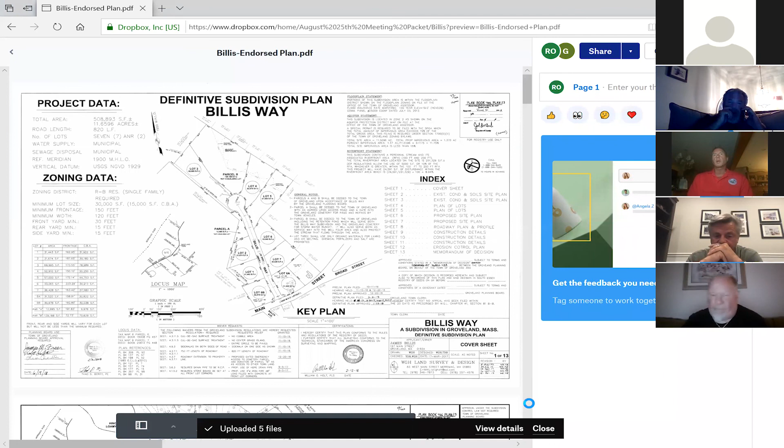I'm sorry, I'll say that again - 150 feet long for what? It calls for a 6-foot privacy fence. It's 150 feet long. Okay, that sounds fine. And that's going in before the snow flies.

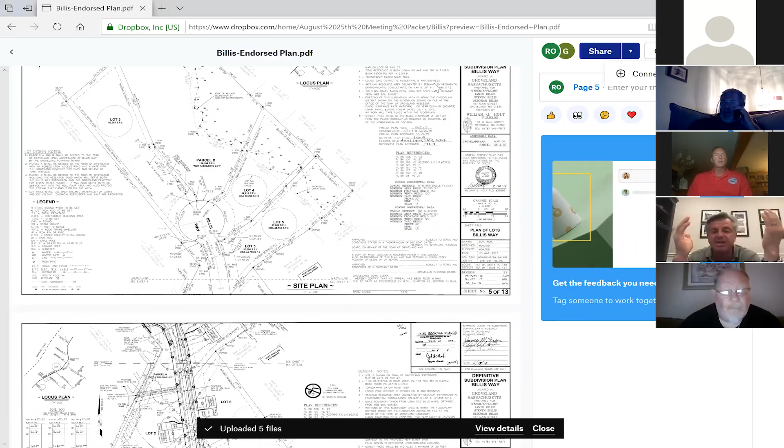So the orange fence will keep them out, and then there's the 150-foot fence. Nobody's going in there, there's nobody keeping anybody out. It's just these two lots. I'm just trying to move forward so we can protect these two and everything else.

And the permanent markings, once you're done with the landscaping and everything, those will go in. You can go take a look at them, we have them installed in other places. They're real easy to put in. And we marked that already. That's fine with that.

All right, anything else on this particular item at the moment as it stands?

Well, if I could, I would just like to ask if some of your planning board members would please just go walk that border, because there's nothing like seeing it. I'm happy to meet with you and any planning board member, we can set up an appointment, we can all go out together and review the whole site. It's fine, I'm open to that.

I've run into other people who were similarly visiting loved ones, and they were really dismayed. I know the plan is set, but you've also said you could change things. So like I said in the beginning, you have one chance on this to get it done right. I have no problem with people moving into our town, I was one of those people years ago. What I have a problem with is anything that destroys or completely dismantles what is essentially the only historic cemetery in our town.

Noted. I'm just trying to think if there's anything else at the moment besides that.

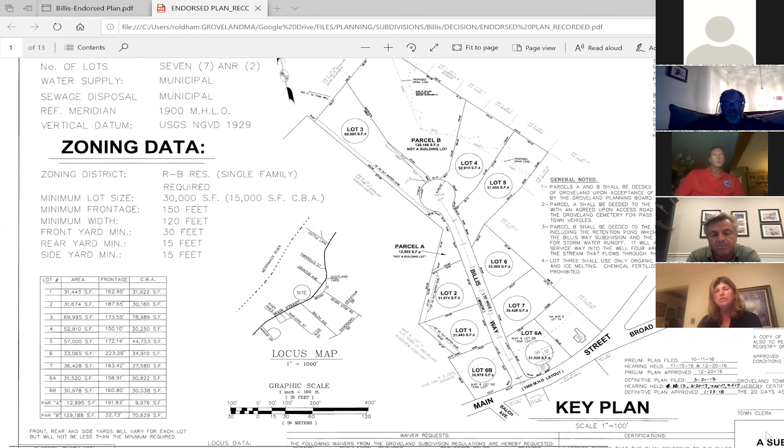But where are you cutting into the hill? Where does that begin on that plan? Because I'm concerned about the erosion. It looks like they just hacked into that hill to get that road in there. Well, I'm concerned about the erosion too.

Yeah, much like Atwood Estates, this plan has some flaws. I met with Peter and with Maureen Cameron, my engineer, and we discussed that. We're going to be submitting a revised plan which would grade and stabilize that slope in a better manner than what's designed on that plan. Hopefully this will be before the board on the 15th, and hopefully they'll approve it. And I will grade that hill and stabilize it. I'd like to do it right now if I could, but I need a revision to the plan.

You don't think it needs a retaining wall of some form? The retaining wall is a problem. The retaining wall designed on that plan can't be built, it's almost as high as the ridge. It's ineffective. I had this conversation with 2 engineers last week, and we all agreed we're going to submit a plan to the board and ask for a minor revision so we can grade that properly and stabilize it properly.

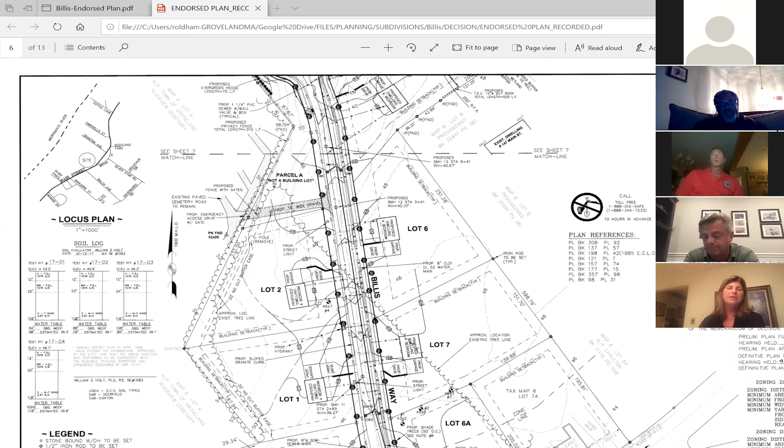Could I ask the planning board to get a town engineer to look into the cemetery side of it, what's better for the cemetery, his plan, or what should be done? Well, the plan's got to be reviewed by our engineer. So that would be Peter. Peter was there at the meeting. We discussed the best way to handle this.

Has he met with the cemetery commissioners to ask their opinion? I don't believe he met with them yet, but he was present at the pre-construction meeting. Absolutely, I met with the cemetery commission at the pre-construction meeting. I went over the fence, the planting, and everyone at that meeting seemed satisfied after they reviewed the plan.

Al, do you think you'll have that plan ready for submission on the 15th, or will it be a little longer? I'm trying to have it for the 15th. I want to have it stabilized. I think it could be a minor revision. I think Peter and Maureen Cameron will agree, and hopefully the board will agree, and we'll get it approved and get it done. I'd like to get that done.

My thing is I would like to get the plan prior to the meeting, not just on the 15th, so the TEC can actually review the plan and provide comments. Yeah, it's just going to be a sketch, Rebecca. It's not going to be a big thing. It's going to be what you call it, Peter? Something sketch. I believe Maureen Cameron called it a construction sketch. Yeah, construction sketch. Thank you.

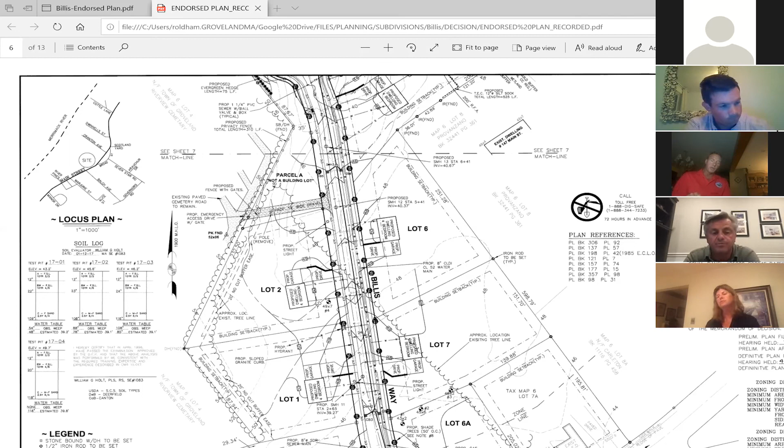Okay, so we've got a couple of things, and thanks for bringing that up, Al, and Kathy too, because that's something you picked up on, and that was one of the flaws in the plans. Happens sometimes. So what I would recommend, if you wanted to float a motion, is to get that orange fence up where the no-cut zones are for those lots we just talked about, and then hold off on the bond reduction till the 15th, so we can figure out if there's any change in the plan.

I mean, I'm all for minor changes, but it still has to be reviewed, and it's going to put a change on the plan. And then if it's all set on the 15th, we could just slide that onto the agenda for then. That bond reduction is for paving.

I was just gonna ask you, Al. Nothing to do with anything else, it's for paving? Just for the paving. Yes, because we held it back since you didn't have it done. I missed it by one day. I was hoping I was going to get it the last week. Exactly, I remember that meeting and everything. Yeah, I'm in favor of the bond reduction for the paving, definitely.

Is the paving already done? It doesn't look like it's all the way done. It's binder. The binder is done to the circle at the end. Have you looked at it? I've driven down there, yes. Okay, and you saw the cut in the hill and the condition of everything and you're still okay with all that? He just approved that he was going to take care of the hill and everything.

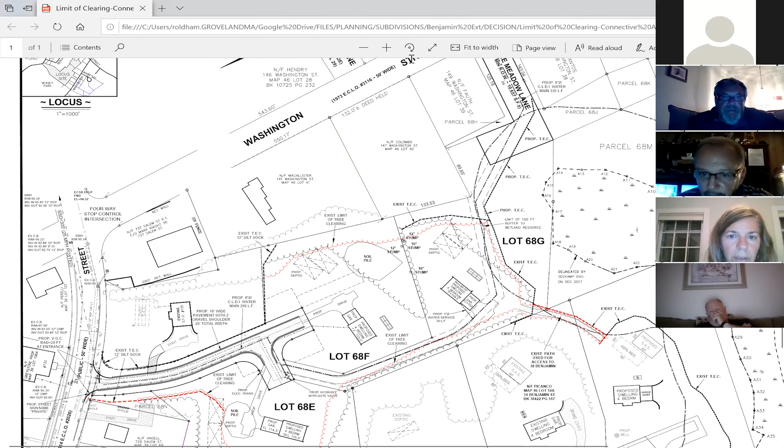Is that tree cutting done back there? Along the property line, I recall at the meetings we discussed keeping roughly a 30-foot tree line along Macallister and Colombo, along that property line.

The tree line that I show in the middle was never intended to be the limit of work. In my opinion, it was just what I had shown for potentially what the tree line would be if they didn't want to cut the trees down. He owns the trees in the middle there, I don't understand why he couldn't cut those trees, regardless of whether I show that line or not. It was not intended to be the limit of tree clearing.

So what is intended to be the limit of tree cutting? The hay bale line was the absolute limit of work that we proposed. The tree line that we showed—I remember during the discussion at the hearings we discussed the tree line along Macallister, along the Washington Street side. We wanted to keep a buffer of trees between that and those lots. So we offered, I believe it was 30 feet, which is what he basically held.

You can see the proposed line—the red line is the tree line. We actually kept more trees along that line than what we proposed. And then there's going to be more cutting because we have to loop the water line. So along the backside of Faith, I can't remember the number, maybe 149 Washington Street, and down through Meadow Lane, there's going to be a water line being installed there.

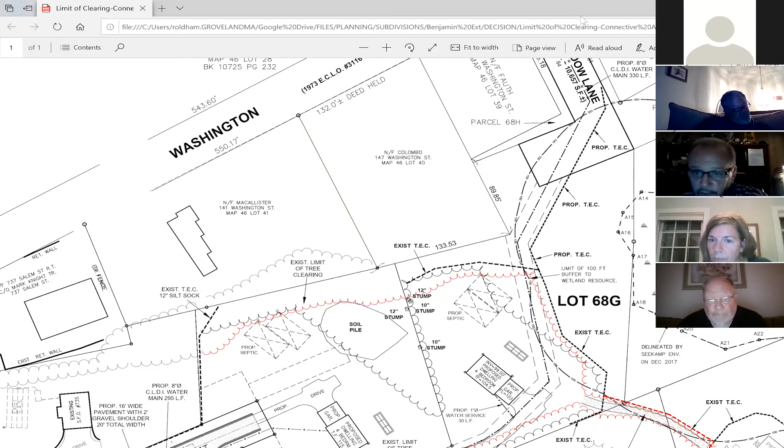So I don't know why—I wasn't there when they cut the trees down, but I can tell you I did stake out the limit, and I told him we had 30 feet off the property line, and I believe he basically held that. You can see the red line on the plan we presented, and that's what it is—it's actually inside that. Yeah, he actually did a fairly good job holding that line. There are some discrepancies, and a couple of big trees were taken down, and he may not have even known that they were being taken down, but they were.

So my big concern is I don't want to see more trees coming down back there than what we've already got. I understand about the water line, and when you introduced that to the Conservation Commission, you said it's going to be a 3-foot trench.

Yeah, which is hilarious because you've got to get all your equipment back there, so we're really talking about between 15 and 20 feet, not 3 feet. A 3-foot trench is what they dig—they dig the 3-foot trench, put the water line in. That's a typical width of a backhoe or machine's bucket. Right, but they have to travel—the machine's 8-9 feet wide, they have to be able to get that machine down through there and turn at the same time. Understood. So the question was put out there: how much disruption was there going to be? And your answer was, well, it's a 3-foot trench, which I think is a little bit misleading to those of us that are kind of neophytes in this area.

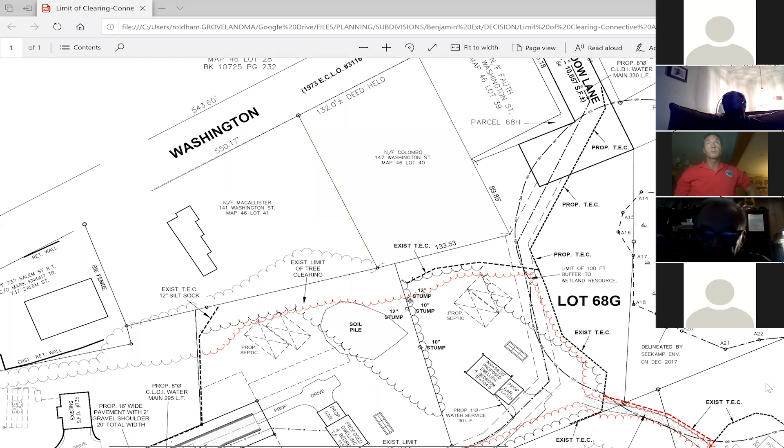But the road that you showed on the plan that Bill submitted does show that the road is in the buffer zone. That's the path the machine went? Yep, that's the machine road. It is in the buffer. Well, it does show that it was in the buffer zone a little bit. Yeah, I suppose it does. The erosion control has all been put back, and I believe Peter's reviewed that, right?

Since we've gone back and fixed everything, yeah, they have the right amount of erosion control surrounding that area right now. I think the board's asking Dina, once you're done with that construction road, to just restore it to its original condition. So whatever that means, you can have Bill come up with a plan. It doesn't have to be very extensive if you only took down one tree.

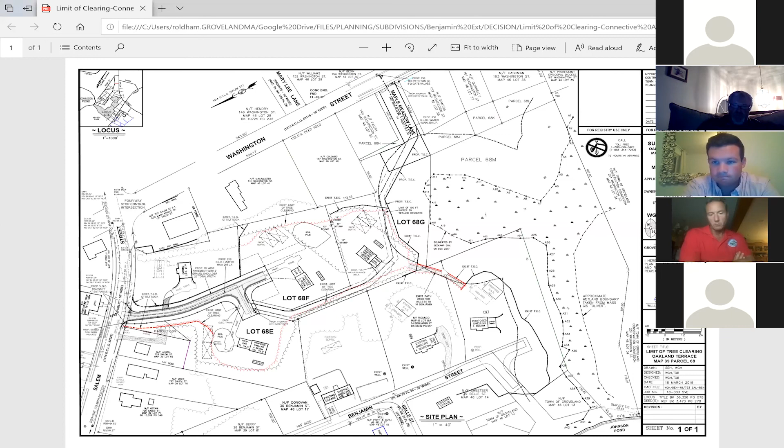Yeah, that's correct, we can propose something for that. Okay, that fixes that problem. All I'm looking for is consistency. All I know is the same company who went over an abutter's property line, inadvertently or whatever, accidentally went over their line. And now all of a sudden did a second incident in which they violated, which was supposed to be the original plan. So I'm just trying to see a pattern here or not, and I'm just trying to make sure that no more of these inconsistencies happen. That's all.

Well, I agree with you. So we've got to get a plan submitted, a landscape plan, to restore that. And then the little area, that other 7,000 square foot piece or whatever that is, will become someone's lawn. Is that what you're saying? Yes. All right, so that's fine. That can be included on the same plan. So that's easy. What else do we have for issues here?

Hi, this is Nancy Suiza.

Hi, Nancy. During that microburst we had a couple of weeks ago, it washed out part of the end of my driveway. I spoke to Dina, they came down and put up two hay bales. Unfortunately, when their construction companies came in, they parked across the end of my driveway, not only Davco but also the paving company. And I had a berm out in front of that driveway which kind of angled the water down the road to the culvert in front of my house. Well, that's kind of gone now, and it's not only washing out my driveway where the hay bales are, but beyond that.

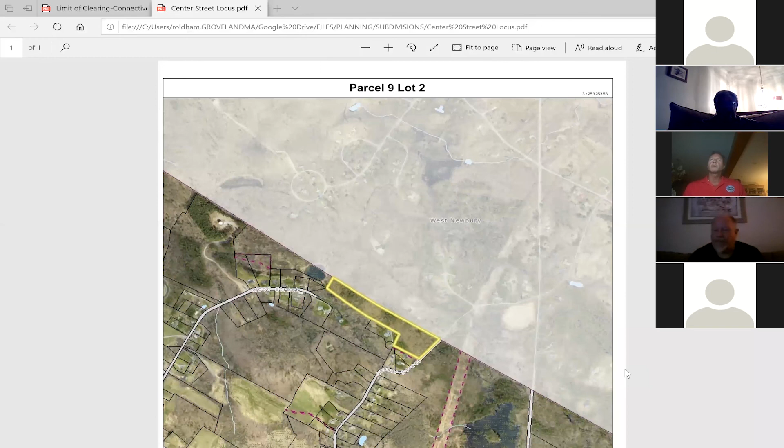How big's the parcel? It's about almost 12 acres, I think. I haven't really done much work on it, so I don't tend to really know. Right there, that's it right there, yep.

Is it a lot of wetland back there, or is it...? According to the GIS, there's wetlands on the left-hand side, I think, as you come in, but back on - I haven't been on the site. I've really just been asked to look at the potential for what zoning would apply to this, and the two things that came up were the CSD and PUD.

I guess the only purpose of my being on the Zoom meeting tonight is to talk about what I see as somewhat conflicting languages. I need to know if either one of these zoning overlays require being on town sewer as a requirement. If we start with the CSD one, I think that's pretty easy. Actually, the more I look at it, I think I've convinced myself that it doesn't necessarily need to be on sewer, but correct me if I'm wrong.

If I look at both, they were designed to be on town sewer. The PUD was rewritten back in the mid to late 90s. And then CSD was a tool that the town put together, and it was supposed to be on sewer, but it reduced the lot sizes and the infrastructure, and then half the parcel, which cannot be wetlands, gets donated to the town.

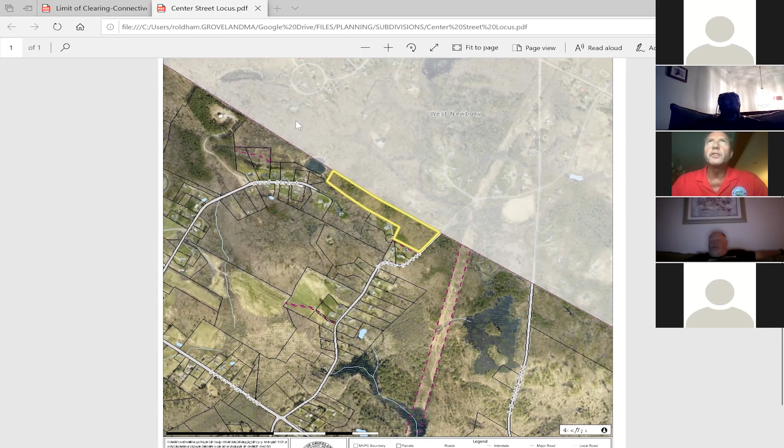So is this an RC zone? I believe it's R2. When you look at it, I figure out where this is -- they call it RB, but there isn't any RB that I can see in the zoning bylaw. I look at the zoning map. This is R2. Yeah, the RB was 30,000 back in the day. It was revised -- this is R2, which is 20,000, unless I'm reading it wrong.

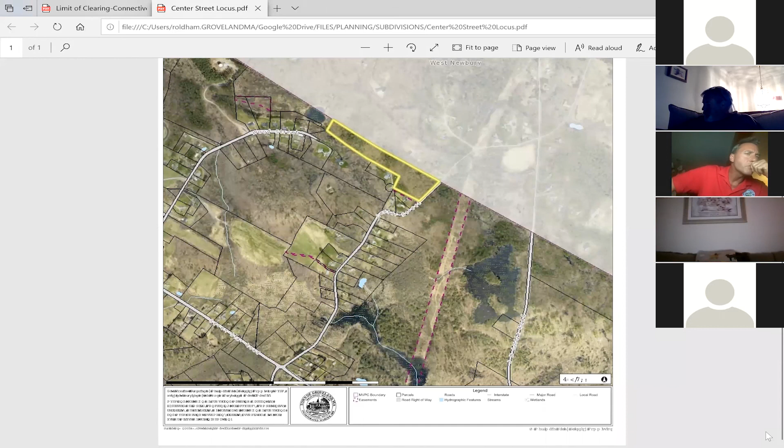Excuse me, I didn't get that. As a CSD, Bob and Wally, I think, and Jim, you could offer a waiver if it meets the other criteria about wetland. Am I right? Well, the CSD is a special permit, so there's a lot we can do with it.

I'm just a little foggy again on the zone, because if I'm going the right way here down Center Street, this borders up on the RA zone, the 1 acre zone. Is that correct? Because that map was hard to see. Yeah, Rebecca, do you have that? I'm pulling it up right now. I can't really see it -- right down past Wood Street, right?

7 Star Road, rather? No, it's Center Street all the way down to the end, or it touches Middle Street, almost to Mill Street. Okay, yeah, so now I know where you are. Right on the line, okay.

We had a couple of house lots down there on the left-hand side. There was a single lot subdivision down there about 5-6 years ago, maybe longer, along that way, and three ANRs that popped up down that way too about 5 years ago, maybe.

Oh, that's down a little further. So, okay, this is right on the West Newbury border, right on the line. I show it as... what's the last name again?

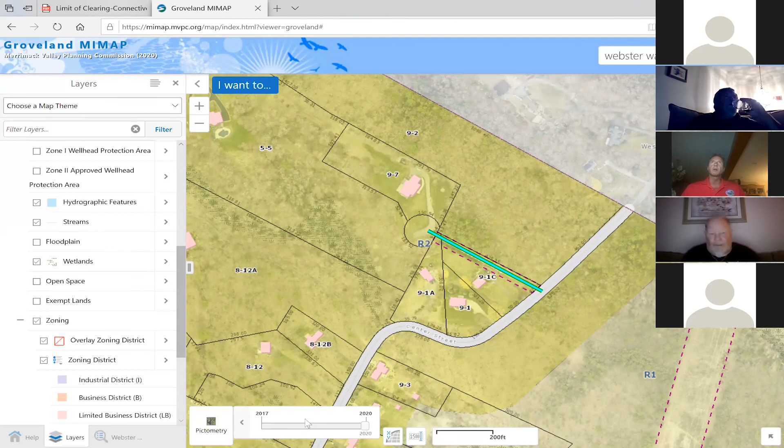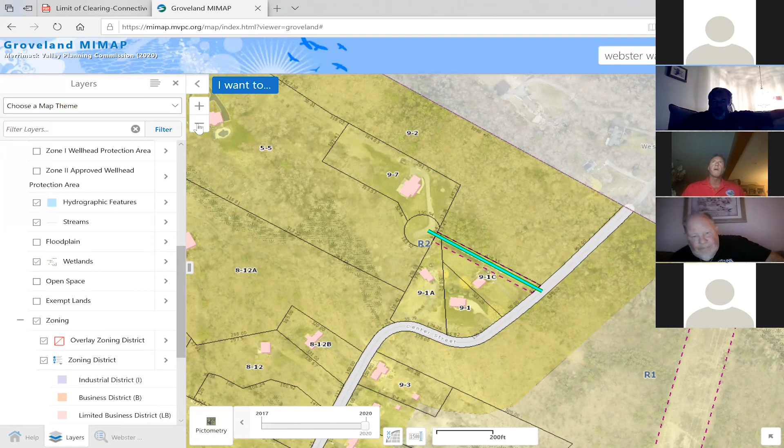Yeah, that's understandable, and that's not really the question I'm asking. What I'm asking is, if they were to pursue a CSD on this parcel, I think what we discovered right now is that we do fall into that clause about being tied to sewer. Is the board inclined to consider septic when there is no sewer available for CSD in this area?

Well, that's where the other thing that came up was one of those very large common area septic systems. That went up for discussion in a lot of different areas, but it turned out not to work on the smaller parcels. I think other towns had that. And so it was left to be on the sewer.

I don't think you could get any advantages on a 12 acre parcel. Even if it was 100% buildable, you're only dealing with 6 acres, which includes infrastructure, houses, and everything else. And I don't think you're going to get much out of that compared to if you do indeed have 462 feet of frontage on Center Street.

You'd probably get 3 houses if it's accessible, if you can access from the frontage out there, and it'd be a much easier approval process. And if it's wet, donate it to conservation or the town, or leave it in a trust for open green space through the Open Space Committee. That's how it was written for Wood Street as well. So I guess it would depend on what application you'd be coming in with and what you're trying to do.

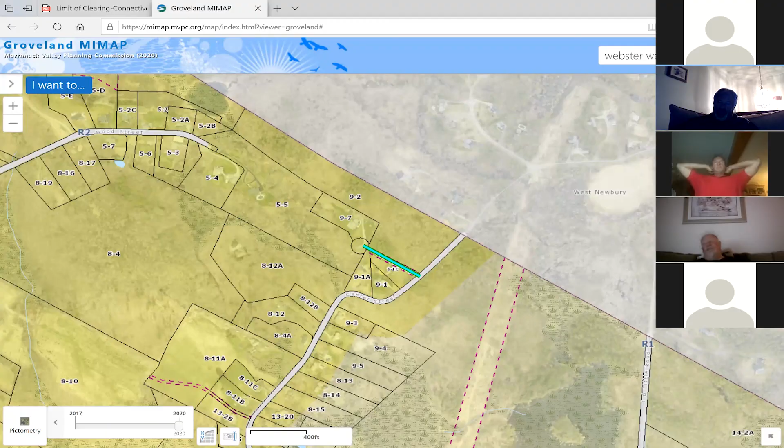Again, I see the differences of what you're talking about, but I don't think you can get a PUD up there either, because there's other requirements for a PUD, and they're not before me right now. But sewer's been the practice. Sewer was written for the CSD. The shall is the shall, and the Board of Health is...

I don't want to go too far into this, but what happens if you cannot connect the sewer because a sewer line? I can see if a sewer line is 50 feet, 500 feet away, then you must connect to a sewer line. But there is nothing out there. So how, well, can you connect to nothing? Well, that's exactly what happened with Whitestone, is that they had to build it. They actually did. They had to build it all the way down the easement through the railroad tracks and then connect it over. And that tied the back to the sewer.

So what, three houses, shall we, you're not gonna do that. Right, that's why I was saying on three house lots, the easiest thing to do is throw in three ANRs with a septic system for each, and you'd be able to get the yield on a 12 acre parcel. If 2 acres or 3 acres is underwater, and half of the land has to go to the town anyway, it doesn't meet a yield requirement that makes any sense. Plus, the area out there is all single family dwellings, not a CSD or a PUD.

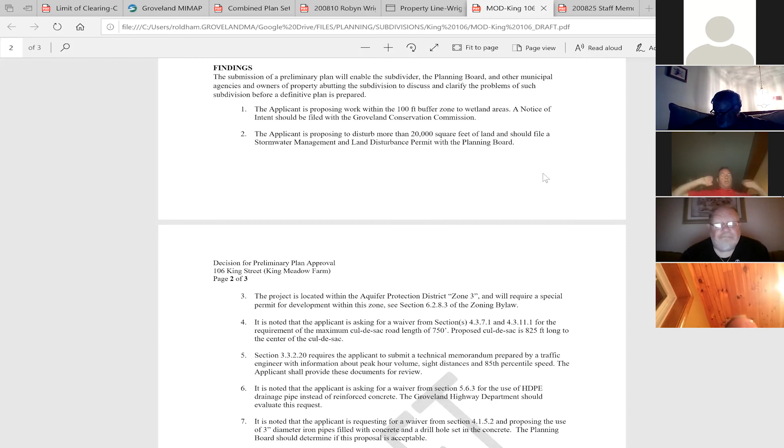The deal I'm trying to make with the water department is between us and the water department. So whether I make a deal with the water department or whether I put wells in, what's the difference? It makes a difference because we don't have enough information, Kevin. You asked us to make a vote on a waiver. Information on what? What more information do you need? Okay, is what I don't understand.

Okay. Well, we got a motion and a second on this draft. Okay, and we got to make a vote on that. So I think you get everything you want in there. We're not going to, the board is.

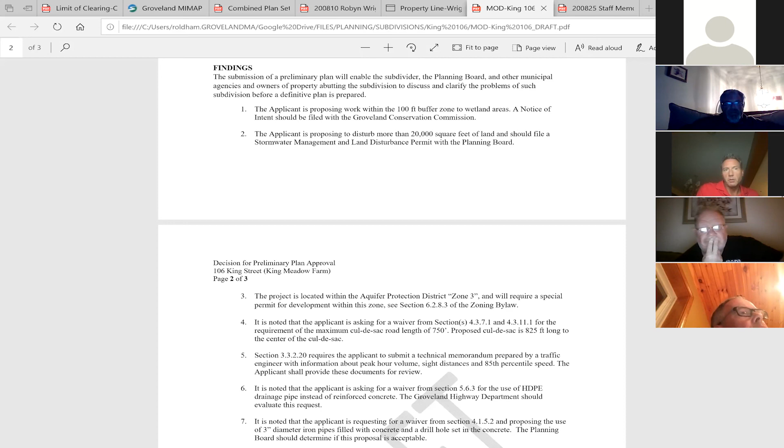Brad, did you want to speak on something? I think you started to speak and you got interrupted. Me? Yeah, I thought you started to speak, you got interrupted. I think what we're putting forward, whether or not we lengthen the road or not, still puts them into the definitive. Yeah, I agree. It doesn't matter what the vote is tonight, Kevin.

All right, okay. So then the board is voting to approve the drafted decision as shown on the screen, and then to close the public hearing for the preliminary, and then to vote to approve the decision and allow them to move forward with a definitive filing. With no votes on any waivers. Yes, the decision would be the one that would do that. There's nothing specified about the waivers other than noting that they had requested them.

Well, you keep telling me you need more information. I'm looking for more information to know what I'm doing. Where am I going? Kevin, I think Jim is new to the board. Well, so am I, but I have a little more experience.

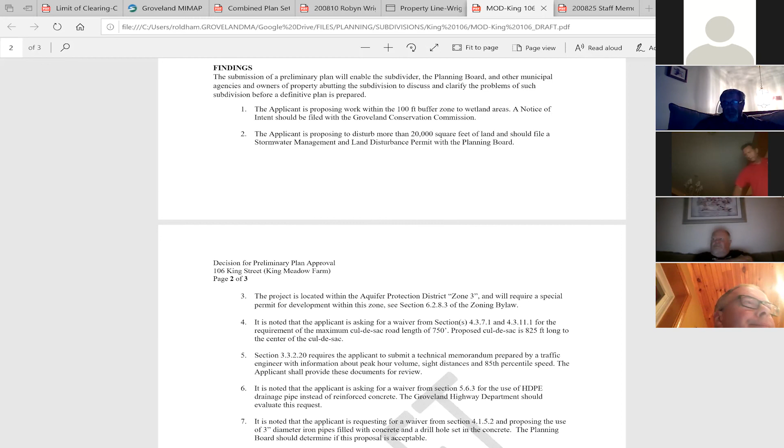We're moving the motion. All in favor? Aye.

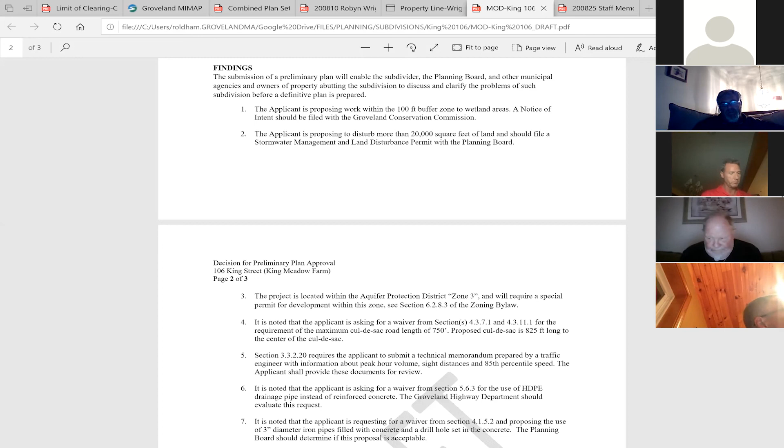Just to clarify, are we voting to close the public hearing and approve the draft in the same motion? No, two separate motions. We already approved the draft in the meeting. Now we'll vote to close the public hearing. Thank you, Mr. Chair, sorry about that.

No motion yet. Let's put a motion up to close the public hearing. Motion to close the public hearing. Second. All in favor? Aye, aye, aye.

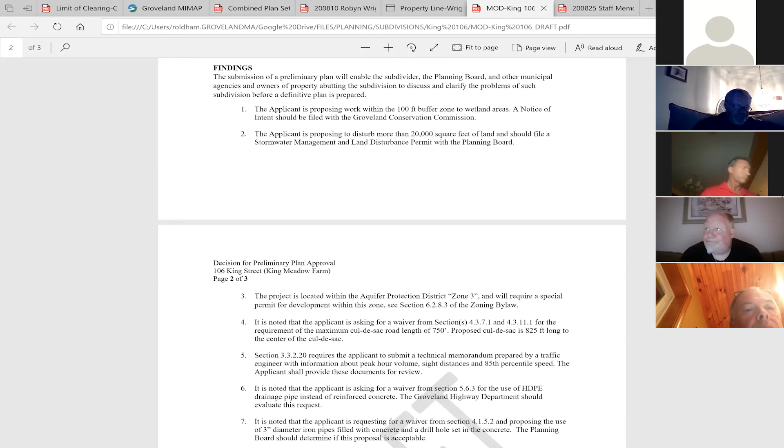Thank you. What do we have next? The minutes, to approve the June 30th, 2020 minutes. Do I have a motion to approve? Motion, second. All in favor? Aye, aye, aye.

Town planner update, I'll be brief. I think all of you have fulfilled your open meeting law requirements. I just received Wally's this morning, so I need clarification if you've also done the ethics test, which needs to be submitted to the clerk. Otherwise we're all up to date. All the other members have submitted their paperwork, so thank you very much.

Thank you. Motion to close the meeting? I'm sorry, I have one more thing. I'm so sorry. Go for it. So I forgot to tell you...

Our next meeting is scheduled for September 15th, as we discussed earlier. The issue is whether we want to meet in person or virtually via Zoom. If we meet in person, we're only allowed 10 people in a room. With 4 board members, myself, and someone from cable TV, that's 6 already. Applicants can wait in the hallway and we bring them in to avoid exceeding 10. The public still isn't invited to attend, but we can put on this setting so the public can weigh in through Zoom, and it's all live on cable access TV so they can follow along. So we can do that for September 15th since we're still not open to the public and can only have 10 people in a room, or we can continue virtual meetings.